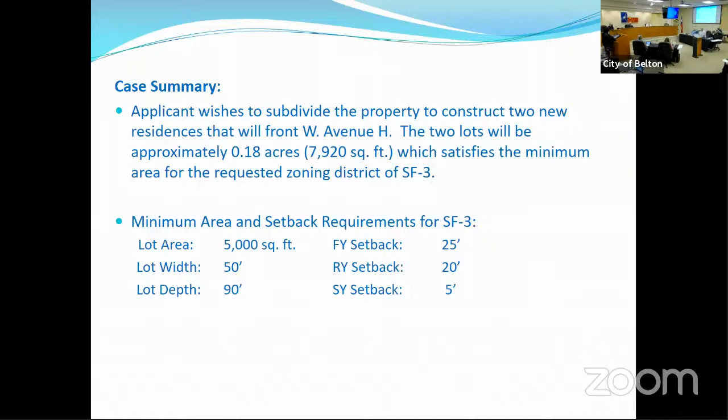Because there are so many different street frontages, the applicant is required to meet a 25-foot setback from Davis, Jackson, and also Avenue H. The applicant has provided that information and meets that setback. The interior setback is 5 feet from the property line, and he's showing that setback as well. The rear setback is 20 feet from the property line, and he meets that as well.

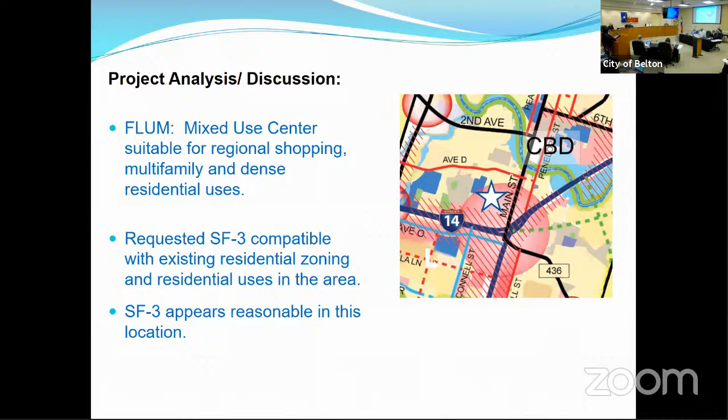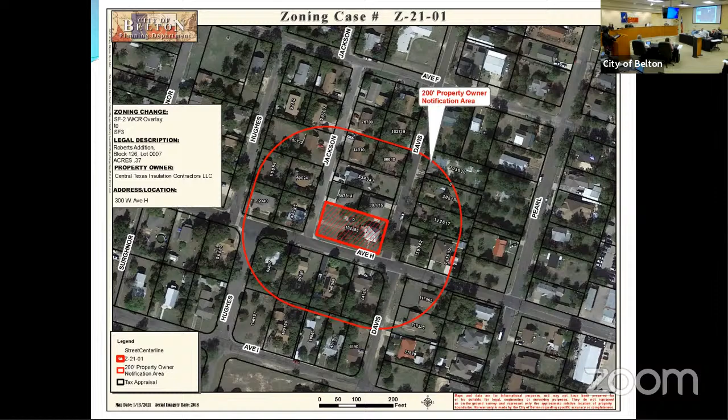Notices were sent out to property owners within 200 feet of the property. We received one letter of support from an adjacent property owner, and we also had a neighbor stop by the office last week to get more information on the request. He was concerned about multifamily residential fourplexes being constructed on the property, but he was okay with the 2 individual houses. The Planning and Zoning Commission met on January 19th and voted 7-0 to recommend approval of this rezoning. Staff concurs with that recommendation. I'll be happy to answer any questions that you guys have.

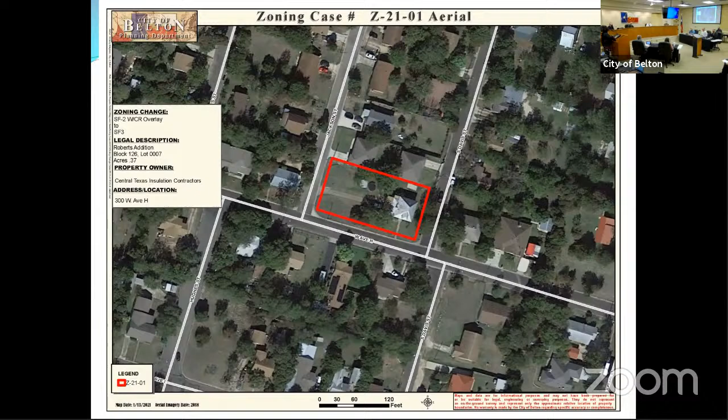I have one, if we could go back to that satellite view. Sure. This one? Yes, well there was one more, the next one, I think, that zoomed out a little bit. That shows the zoning? It was a satellite, but that's fine. This one? Yeah, that one.

So it looks to me like, and I know you probably didn't measure all those lots, but looks like to the north and west there are 4 houses right there on that end of the block, and then just the north end of that block there's 4 houses, and it looks like those lot sizes would be pretty similar to these two, just looking at it overhead like this. Correct, most of the property owners in this area have already subdivided their property into 2 different lots, so it is very compatible with what's already existing there. Okay, I just wanted to point that out. It looks very compatible.

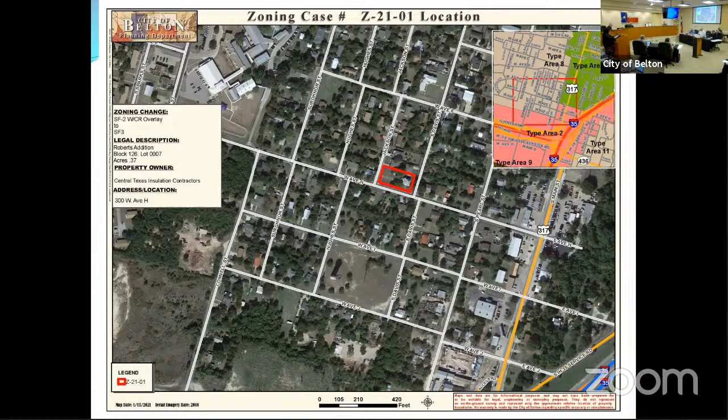Correct. I sure appreciate the applicant adhering to the setbacks in this area. That makes a big difference to me. And one thing I have noticed and get a little concerned about is parking and parking requirements with infill. It seems like we are not able to control or oversee that very well once the zoning is changed, so I'm curious about the parking requirements for this zoning change.

What is required is they're supposed to have 2 parking spaces for a single family residence, and the house plans actually show a garage, a 2-car garage. They're also required to have spaces outside to accommodate for maneuvering in and out of the parking area, so they will have a driveway access off of West Avenue H to accommodate for that as well.

No other questions, infill is good. Infrastructure's already there, so we don't have to worry about all the other things. That's good. I drove by that property yesterday and it looks like an ideal use for that old home, which is going to be gone. Two nice new homes will improve the looks of the neighborhood. As David said, infill is good. It fits the philosophy we've been trying to establish of upgrading and filling in spots. It looks like a win-win for everybody.

Any other questions, or do I hear a motion? Public hearing, go ahead. Anyone wish to speak for or against this?

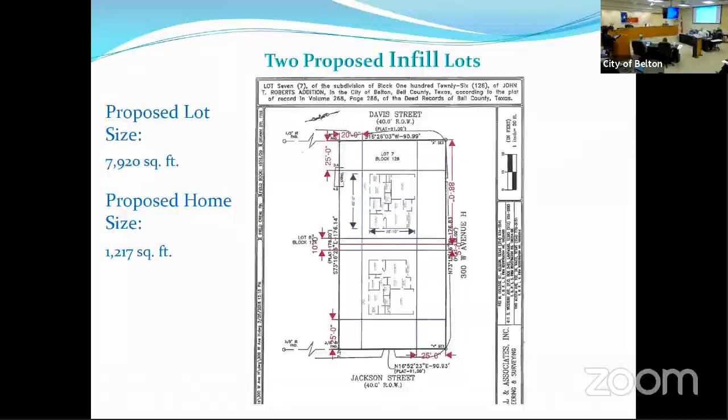All right, so I guess if there are no comments, I'll make a motion that we adopt the zoning changes presented. Second. All in favor, say aye. Aye. Any opposed? Measure passes unanimously. Thank you. Thank you.

Item 9 is to consider the following actions related to the proposed River Farm Municipal Utility District, located east of I-35 between Shanklin and Elmer King Roads. Mayor Pro Tem Kirkley is going to excuse himself at this time. East of Toll Bridge Road.

There are 3 separate propositions here: A, consider authorizing the city manager to enter into a development agreement with River Farm Limited; B, consider a resolution authorizing the creation of the River Farm Municipal Utility District; and C, consider a resolution consenting to annexation of the city tract into the River Farm Municipal Utility District upon completion of obligations related to the construction of Toll Bridge Road.

Thank you, Mayor Carpenter and council members. We're here today to look at the 3 items associated with the creation of the municipal utility district for River Farm. If the council's ready tonight, all those items are ready for your favorable consideration. This is a significant request, one we spent quite a bit of time on last time during a work session. I'm going to go through a series of slides. Some are similar or repeat of last time, but I think it's a significant enough proposal that I want to reiterate some of the information we talked about.

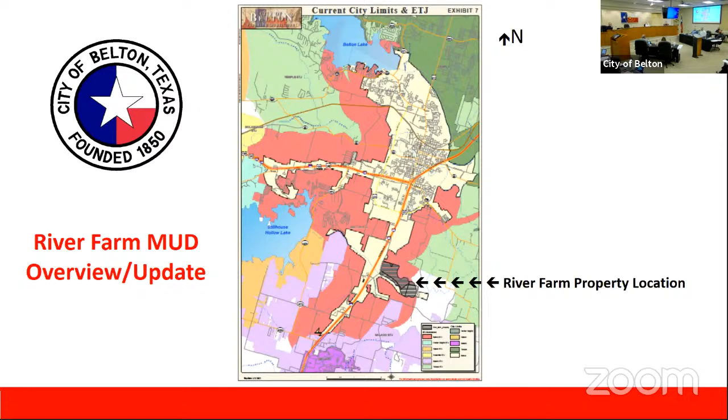Okay, as was mentioned, we're here today to look at 3 different items for your consideration. After our work session last time, the input from the council at the previous meeting focused primarily on density of the project and development quality. We've talked a number of times about the number of units, the maximum 1,775 on this 481 acres, just under 4 units per acre, with a minimum lot size of 50 by 100, or 5,000 square feet.

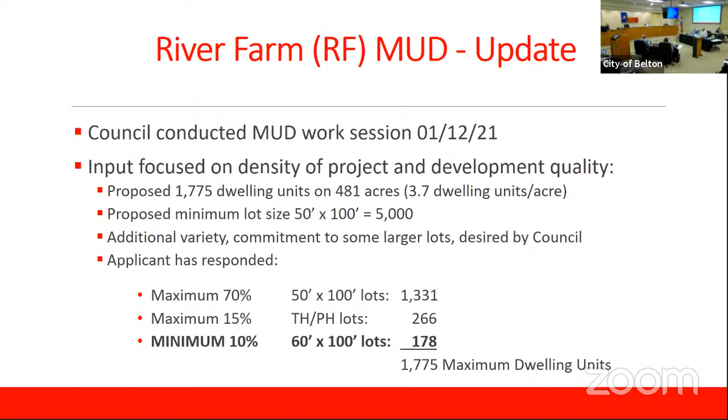What the council expressed last time was an interest in some additional variety and a commitment to some larger lots. The applicant has responded with the proposal you see there, stating a maximum of 70% of the lots would be 50-foot lots, a maximum of 15% would be townhouse or patio home lots, with a minimum commitment of 10% to 60-foot lots, or 6,000 square feet. That was in response to what the council mentioned last time.

Again, as the mayor mentioned, there are 3 items on the agenda for your action tonight: authorizing the city manager to enter into the development agreement with River Farms, and then 2 resolutions—one authorizing the creation of the MUD, and finally a resolution consenting to the annexation of the city tract, that's the portion down along the river, into the MUD upon completion of the Toll Bridge Road obligations.

So last time we talked a bit about annexation and de-annexation. This is a similar slide to what we had last time. Again, the overall acreage, just under 500 acres, part inside and part outside the city limits.

The proposal is again for an outside city MUD, which would result in the maximum reimbursement for infrastructure. The 304 northernmost acres to be developed first, currently in the ETJ and subject to a non-annexation development agreement, which expires later this year. The area along the river, the 177 acres, to be developed later, and the obligation for Toll Bridge Road, when that is satisfied, the current city limit portion would be de-annexed.

Another important consideration in this MUD is the commitment to a strategic partnership arrangement or agreement. And what that does is the applicant and then all the successive purchasers of homes in the area would waive their rights to oppose any future annexation of the property when the MUD bonds are paid off, if the city chooses to annex the property at that time.

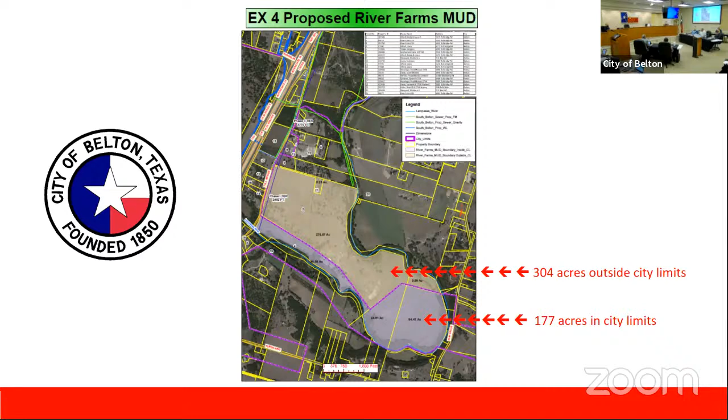Some of the elements that are included in the MUD development agreement, again, an emphasis on the maximum number of dwelling units that will occur here.

Something that's important, and we talked about a little bit last time, the applicant will still be subject to all the subdivision ordinance, subdivision plat review to occur by P&Z, City Council, and Bell County Commissioners Court, and compliance with city standards for streets and utilities.

So that's the major review element, the review as development phases come forward. You'll see that in multiple phases, as you have with Three Creeks in recent times.

On streets and drainage, Bell County will be responsible for those following inspection by the city and acceptance by Bell County. On the water and sewer, of course, we will be responsible for those for maintenance following, again, construction, inspection, and acceptance of those. The term of the MUD is 30 years.

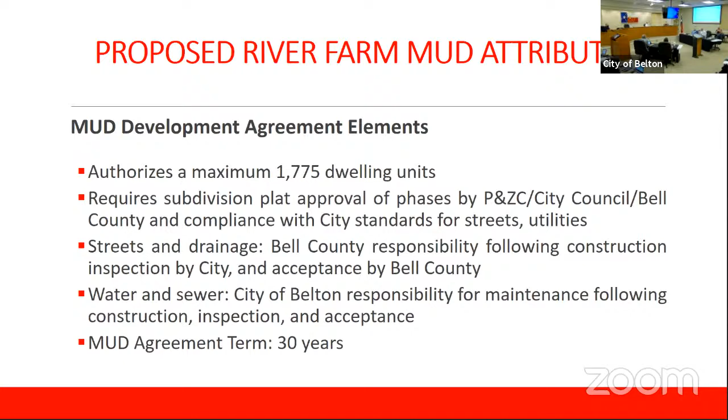And so I wanted to mention that. I don't know if that came up last time, but wanted to reiterate that back to y'all as well.

Again, continuing some of the elements that are in the revisions that you have before you, there is one whereas recital that I wanted to call to your attention. It indicates that the owner will be seeking a MUD through either TCEQ or the Texas legislature. It's the number 4 whereas on page 2 of the development agreement.

The owner cannot change the MUD terms approved by the council, but the schedule, as we understand it, is the issue that's kind of creating this dual approach, basically. The legislature, obviously, with their session ending likely in June, may be a quicker path to the actual establishment of the MUD than TCEQ, which would probably take till the end of the year.

Our attorney representing us, Trey Larry, is available to answer any questions you might have about that issue, but that was a new component in this draft. Originally, it just said TCEQ, but the legislature component was added, and we've inquired about that and asked about that. But again, we're proceeding, and we're certainly here today to recommend approval of this item today, recognizing this dual path, but it won't change anything the council is considering, because whatever agreement you make with the landowner, those are commitments that would be reflected in any outcome, whether that is from the legislature or by just TCEQ.

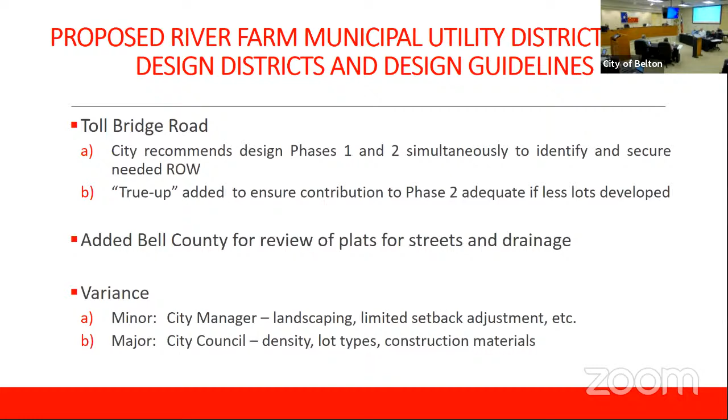Again, the water and sewer reservation is identical to the one from last time. 33% of the capacity utilized by this development, with a significant contribution toward that, almost $2 million on the sewer side and $400,000 on the water side. So that's significant, and it will occur with building permit payments as each final lot is platted.

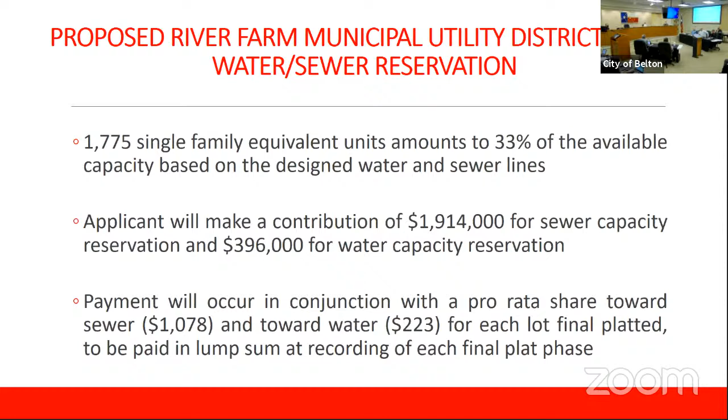Again, Toll Bridge Road, we've talked about this a bit. This is similar to last time. The developer will build Toll Bridge Road adjacent to their entire property with the first phase. We'll build phase 2 later, and there are some timing issues associated with that. We look to try to get the design for that addressed up front.

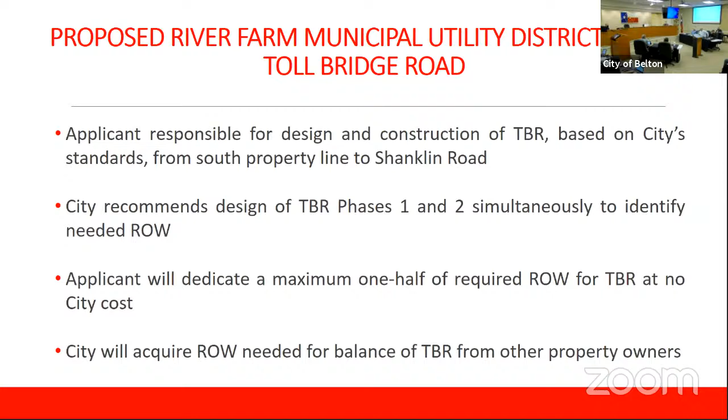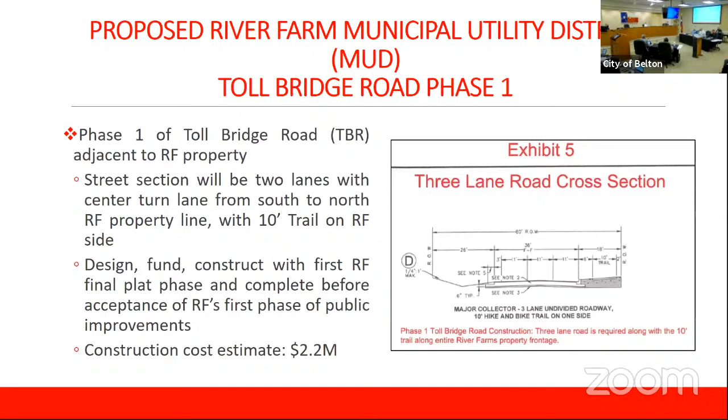The applicant will dedicate half the right-of-way, and then we'll secure the other right-of-way. Again, these exhibits are the same as we showed last time: the street section, the 3-lane section adjacent to their property, and then the 2-lane section north of there to Shanklin. The timing of that is described here, as well as the true-up that we mentioned before.

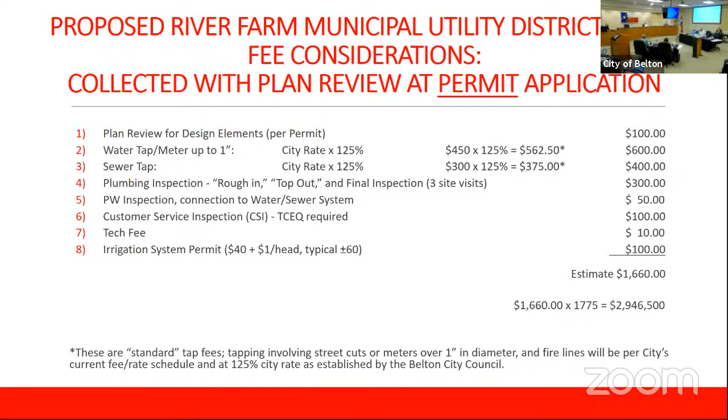So here we are at the conclusion of my summary. Basically, as I mentioned, there are 3 actions for the council to consider tonight: authorizing us to enter into a development agreement.

The MUD development agreement is the umbrella agreement. Items B and C are actually part of the MUD agreement, but we are required to take action separately on those: approving a resolution authorizing the creation of the MUD, and then also a resolution consenting to the annexation of this property into the MUD once the obligations for Toll Bridge Road have been satisfied.

I will stop there and indicate our position that we worked very closely with the applicants, their attorney, and all, to try to get this in form for the council to consider tonight. We believe the applicant has been responsive to the council's comments last time, and we believe the detail is sufficient for your consideration. The agreement and the associated resolutions are in substantially complete and satisfactory form for your consideration tonight, if you're ready to act on it.

Our recommendation to you would be to approve all 3 items, subject to any final input from the city attorney and any concerns or comments the council might have at this particular point in time. I'll stop there and answer any questions you might have.

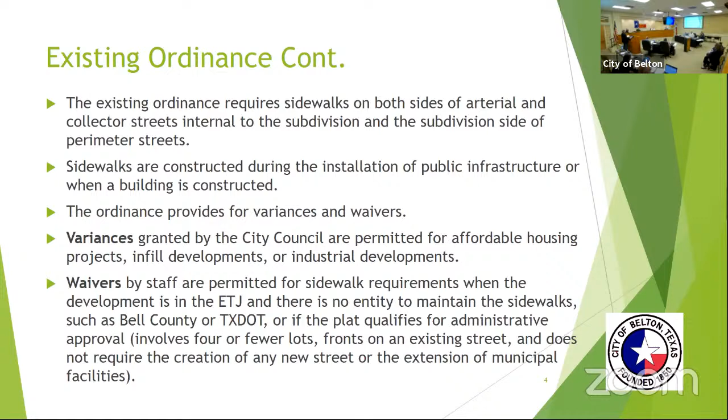Beginning in the fall of 2018, we began to review the sidewalk policies. Staff began that, and we began stakeholder discussions and discussions with the city council and the planning commission. Since then, there were other items that needed to be addressed in the subdivision ordinance, and those items were brought forward and adopted in the fall of 2020. As you know, we had some staff turnover, so that was a little bit delayed. But during that time, we've done some thinking about the process, and we came up with this particular avenue in order to move forward.

So in review of the information we have in the minutes and so on, we learned that there are a lot of questions and concerns about the cost of the sidewalks and the impact it might have on development, particularly in the areas of affordable development or commercial, industrial, and institutional. There's really no consensus in that area.

There was no real move-forward point that the process ended with, and for us to just kind of pick up and run with it so we could finish the process. But there were some concepts that emerged, that I saw emerge in those conversations.

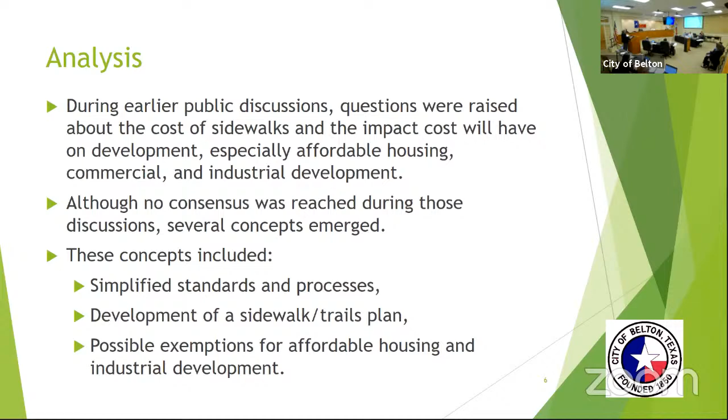Those concepts included that we needed to look at the way we administered the sidewalk process. Is it too standard? Is it too rigorous? Maybe we look at developing a mobility plan, a sidewalk plan, or something like that. And then let's evaluate the exemptions and possibly think about affordable housing and industrial development. Those are themes that kept coming up and were very apparent.

So to address these concepts, we felt a more comprehensive approach was maybe appropriate, as opposed to just beginning with a sheet of paper that had the red lines on there. It really didn't have a context of where we're trying to go with the sidewalk policy. So this process helps us put it into a context, a more comprehensive approach. I think it will enable us to examine a more flexible way to administer sidewalks and trails and so on in our development process.

So we developed the master plan, and along with that we also developed some planning guidance statements, which helped us put the lines on the map, so to speak.

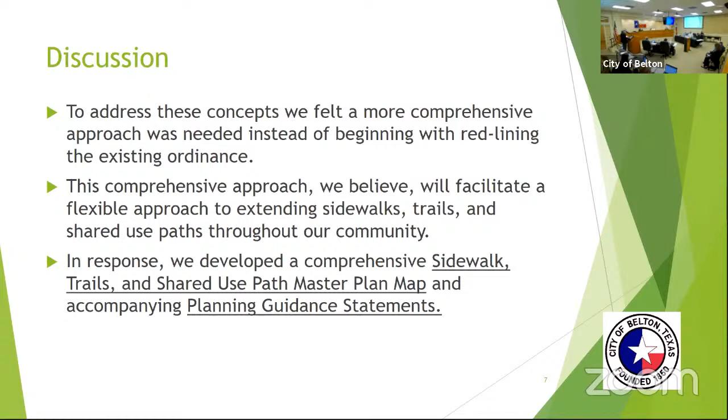So here's an example of the map. It was developed now. It's a fairly comprehensive document, and we'll zoom in on some parts of it here in a second. During the summer of 2020, Tina and our intern walked through the town and identified all these facilities, putting them on the map, combined with the work Public Works is doing in terms of future facilities. You can see Loop 121 here.

You can see the yellow line going up and down there. Those are facilities that we know are going to happen. The colors are: green is existing, yellow is planned and we know it's going to get built, so there's construction plans for them. Red is where we anticipate the facilities to go.

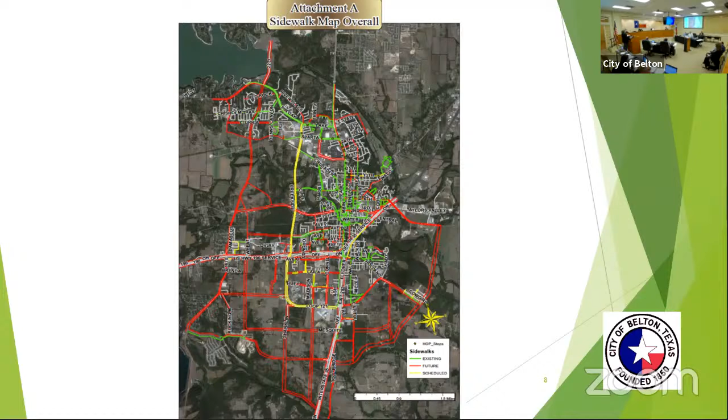It follows our thoroughfare plan very closely. So if we were to throw our current thoroughfare plan underneath it, we would see all the red lines line up with the thoroughfare plan.

By the way, I decided not to do this at this presentation—we can do this later as well. But if you go to the city's website and look under GIS, we have that document there. You can zoom in and out and go all around and see all the details that are there. If you want to see it later, we can show it to you.

I think this approach provides several good advantages: it provides a long-range vision, a plan of how these facilities will create an interconnected system, and it identifies where these facilities are expected to be built. In combination with the planning guidance statements, the plan will guide the development of future facilities and paths. It also identifies who might be paying for what.

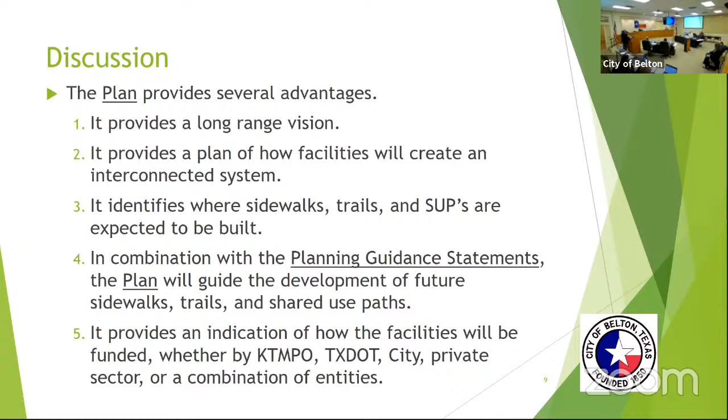There may be some instances where we want to put a sidewalk in a neighborhood, but we know there's no real development pressure to pick that up, so we know that's going to show up on our CIP, and we can talk about eventually building that. But if it's an area with plenty of opportunity to discuss a sidewalk project, maybe we need to put that on the private sector, or it may be a combination of both public and private sector. Those are great opportunities to do this.

As we developed the plan and talked about where to put the lines and why, we came up with certain value statements, which I've begun to call planning guidance statements. They've evolved into four types: retrofitting residential areas, retrofitting commercial and institutional areas, industrial, and areas open to new growth where there's little or no development.

So in the next few slides, I'll hone in on a few things and show you what I'm talking about. Here's an example of retrofitting the residential areas. Immediately I'm wishing I had the web-based map so I could draw on this thing. Highlighter—there we go, does that work? Okay, well then y'all behind me don't see me.

So I'm going to talk about 24th and Beale right here. I'm going to put this thing down immediately before I put somebody's eye out. So the idea here is with the residential retrofit.

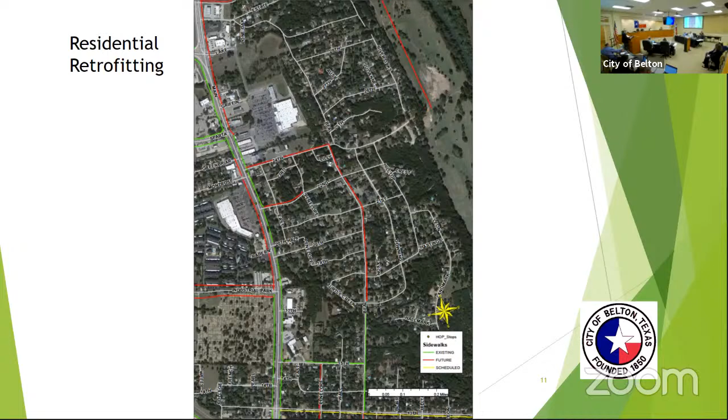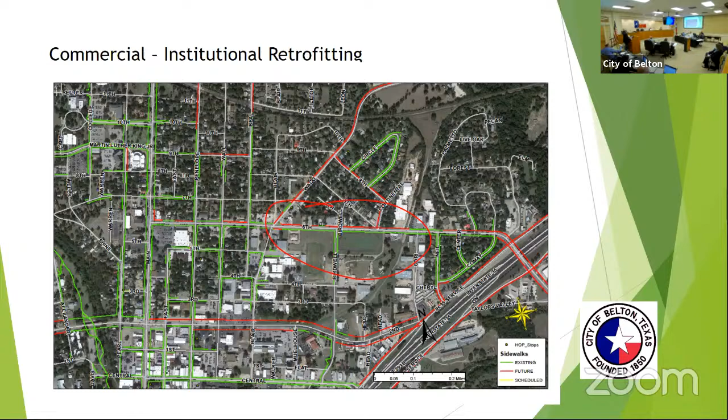All right, thank you, and yeah, there's 6th Street right there. So you can see it on the other screen too, I believe. There we go, sorry for making you guys crane your necks. So that's an opportunity where we can see what the plan would show, what do we anticipate. Here the green is existing, red is proposed, so we have some idea of where it all goes. You can see the green tying in beautifully into the red, and you might even see, well you don't actually see the South Belton shared use path, but it's anticipated in that area. So it all ties together. We have this large comprehensive plan.

And then we're looking at the industrial area, and we see here, that area right there, mostly on the north side. So we see very few red lines. We anticipate that may be a policy statement that you explore, in terms of what do we want to see in our industrial areas or areas that develop with an industrial character. There's an example in the plan where we've basically not addressed too much of that at all. So we've kind of informally taken the position that, in conversations in the past, although it's not a consensus, maybe we shouldn't be requiring sidewalks in these particular areas. So we begin with that position, and we'll see where we go from there.

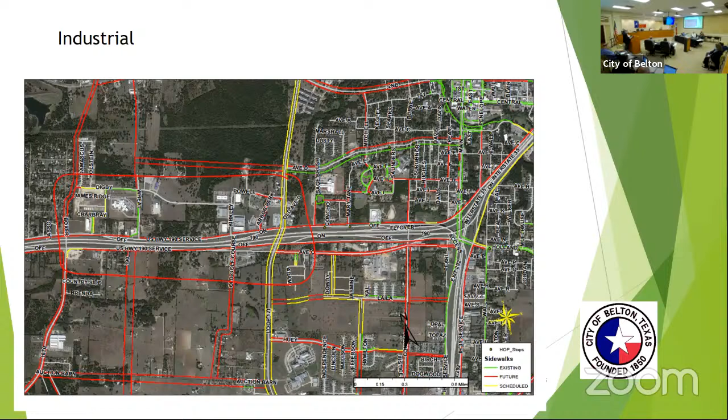And here we have an area that is largely in the ETJ, some in the city, and these all follow the thoroughfare plan. So we can see that there's a significant opportunity to see new development in that area. As we go through the development process, we can evaluate future needs in terms of pedestrian access or non-motorized, however you want to view it, with the area. So we have those opportunities to evaluate that as we go along.

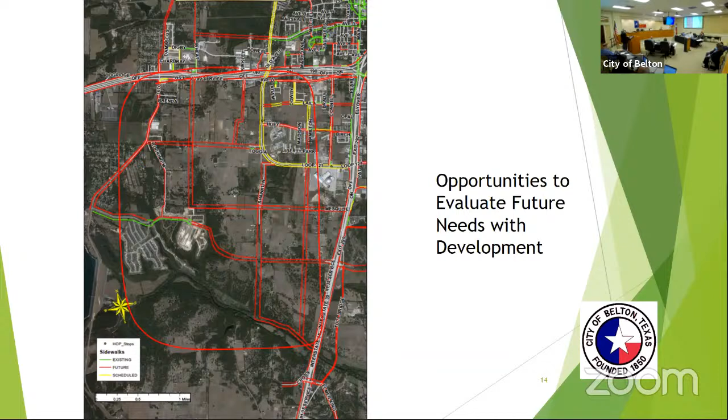All right, well believe it or not, we're getting close. So here is where the planning process kind of leaps off into the current planning process, into the platting and building, that kind of thing. So when we talk about it in terms of the development process, the plan that is being developed has to be consulted in terms of deciding where sidewalks will happen. I'm suggesting that when we decide this, unless it's specifically exempted, new development has to include the sidewalk. But we have to be guided by the master plan and the planning guidance statements, and we have to have that conversation with the developer or the property owner to see if it makes sense in that context.

We believe that this approach gives us a little bit more flexibility in terms of where things go, why they go there, that kind of thing. And it also opens up that conversation between the city and the property owner or developer in terms of that discussion as to why we might want that or why we might not want that.

We anticipate that there'll be some very familiar procedures in the new ordinance, although that hasn't been written yet. Like I said, we want to have that conversation first. But we anticipate that if a plat's approved and there are some discussions about sidewalks, then the outcome is decided by the approval of that plat.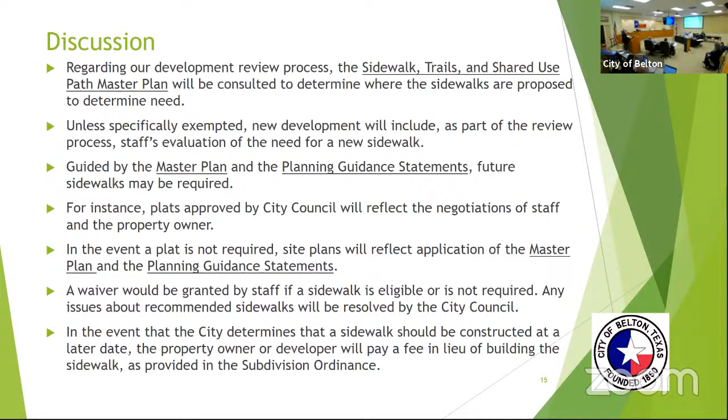So our thinking is that we begin the discussion today. We continue the discussion with the Planning Commission, and then we take it out into the public with the EDC and stakeholder input. Then maybe in March or so, we begin the adoption process, hopefully with some words assembled in the ordinance that everybody feels very comfortable with and can be happy with. We hope that maybe in early spring we would have a discussion with the city council after a public hearing that we can adopt an ordinance.

So that is it. Thank you for being so kind and patient with me to hear all those words. As the plan is, we'd like to get your feedback and discussion. Are we on the right path? Are we off too far in left field, or do you need some adjustment from us?

I appreciate the effort and the map and identification. I'd also hope we could identify areas that are developed, that it is now up to the city and our responsibility to go back and put in sidewalks. And if we continue to force the developer to do that, but don't take our own initiative to go back and put in those sidewalks, like Main Street.